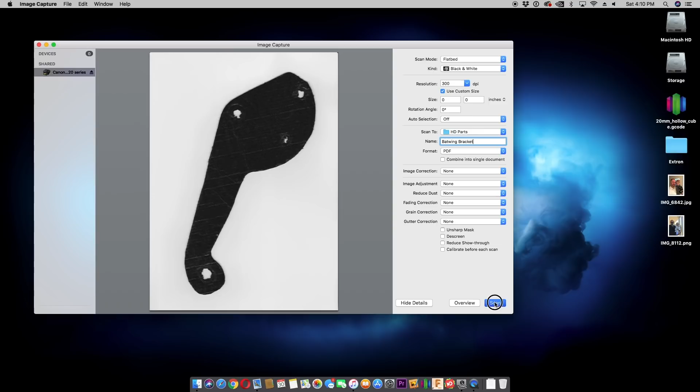Right, everything else is pretty much standard, and we'll go ahead and just scan this in. I'm using Image Capture on the Mac. Oh, sorry, I didn't select my area. We'll just let it auto detect. Looks good. And we'll just go ahead and scan it.

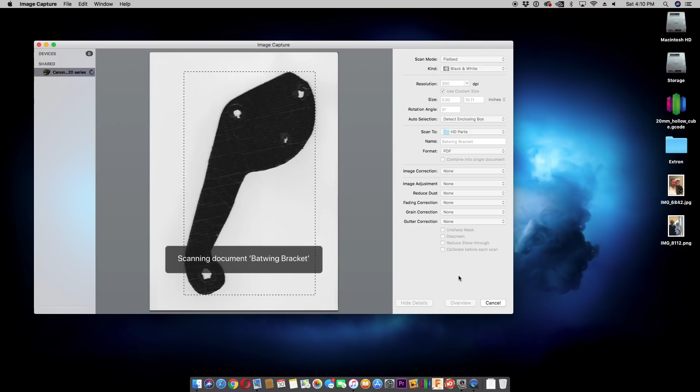Alright, so there it is. It's scanning, warming up. This is the hard part, right? It's making sure we've got this nice clean line, good contrast.

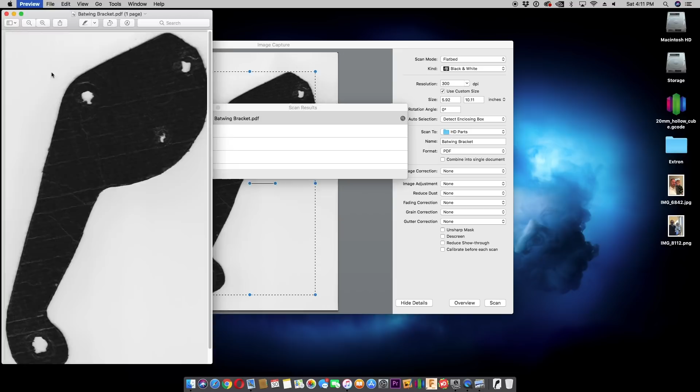So now when we open this—oh, I saved it as a PDF. Oh well, we're going to export it. Yeah, I made a mistake. This needs to be a JPEG for what I'm doing. I could use PNG, but we'll do that. I'm just going to save it in my downloads for now. So I've got it as a PDF if I ever want to print it off and do this by hand. It's there. We are ready to go.

So I am now working remotely on my PlasmaCAM. Do a new drawing. And so this is one of the tricks that I do all the time—rather than have to physically be at the machine all the time, I'll use remote desktop to get to it.

So we're going to import our drawing that we just scanned. And I did go back and make sure that it was in the right place—it's upside down. So I know I saved that in my downloads folder, but I moved it. All right, so here it is.

Right now, I really just want the black part of it. So I'm just going to select this color and take a look. No, that's not good. So now I need to add that in. All right, so we're starting to get a better feel for it.

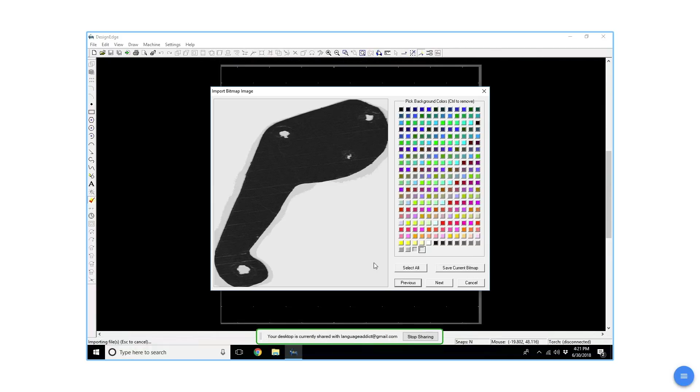I could pick one of these in here. We're pretty good at this point. Maybe I'll go one shade darker. All right, that I think is a pretty good outline. It's not perfect, but we're here and it gives me something to work from.

Now, I should have gotten some of this ready ahead of time. I'm back. So I know these two holes are 313.

I also know their distance. So I look at that, it is 185. Of course, I'm getting all kinds of stuff on here when I don't want to. When I'm recording, okay.

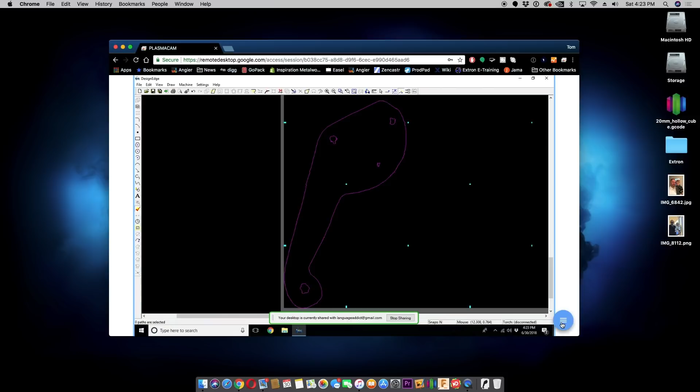So if I were to just drop a point. Let me make sure - oh really? That's neat, I have to do a lot of editing here. So if I were to drop a point about the center of where I think that is, and about the center of where I think this is - that's annoying.

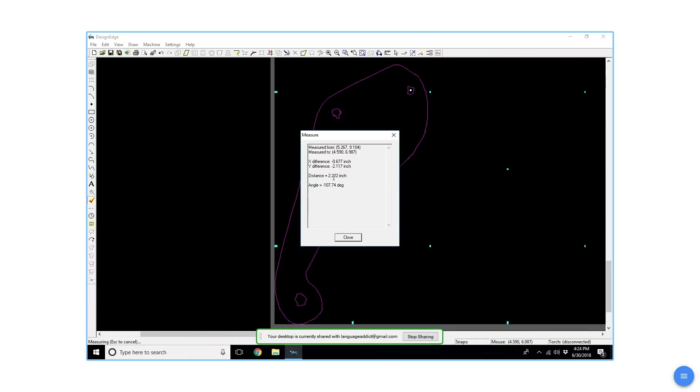I should be able to measure from our point here to our point here. All right, so I'm a little off, but actually I'm not that far off, right? Good. Now I know those points aren't perfectly accurate, but that was just to get me close.

So that's good. I know that these circles are 313. I'm going to oversize them just a little, make them 325 because I can. So I'm gonna put that guy about there, and I'm gonna do it again.

I know I'm using some shortcut keys that are specific to mine, but that's okay. Now what I will do on these is I will adjust these holes to be right. This hole is actually supposed to be a slider, and according to the original bracket, it's about 680.

So we'll do the same process. We'll do a circle, 0.680, and we'll drop that guy roughly center on where that mark was. Okay, there's that. We'll smooth this a little bit, so we'll go in, edit, smoothing, and you can either just click - I'm gonna give it 10 thousandths. That helped a lot. I'll probably just go back in and clean all that up anyways.

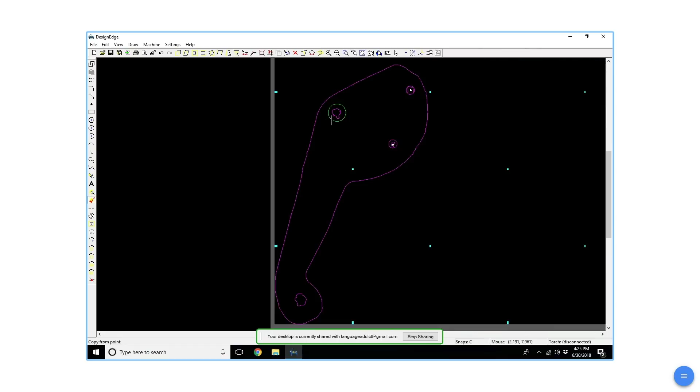Oh, this guy down here is also one of these, so we'll copy that. And we'll go from the - oops, wrong button there. Let's copy it from here. Oh good, get my center point.

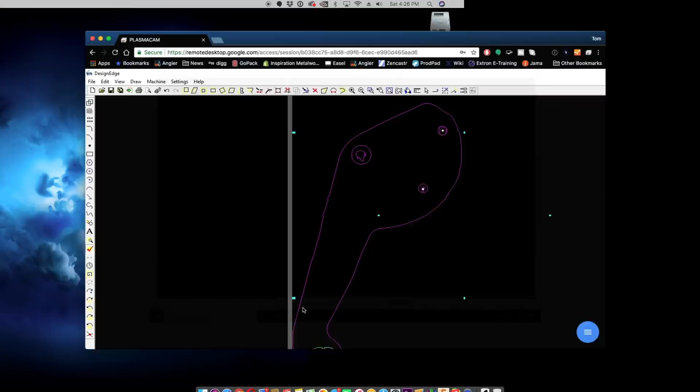And we'll drop that guy right about roughly the center of that. Not so much, dang it, I keep doing that. This is the problem with keyboard commands. Roughly the center of this, right? So I'm looking at this part, because these holes were just kind of ripped in. They weren't exactly right. Okay, so this gets me pretty close.

Now, what I typically would do for this now is just start cleaning up, right? So I will turn on things like snapping to node points, and I see all this jagged stuff. Well, I know that I've got a node point that's pretty straight here, and one that should be right where that's tangent.

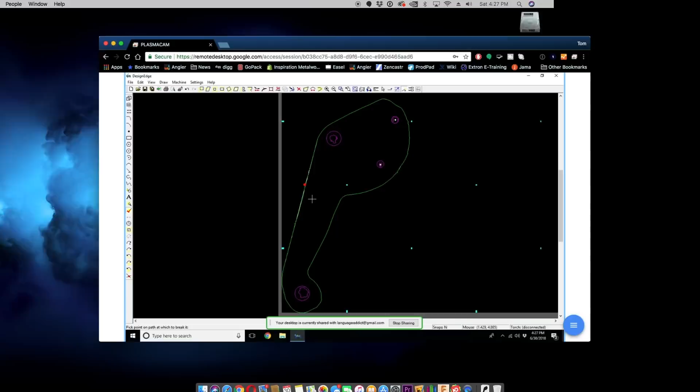Now that that's there, I can actually trim all that other junk out - wasn't, oh dang it, did it again. This is really annoying, we're gonna undo. Okay, so now that I have these, I can come in here and trim this other stuff out.

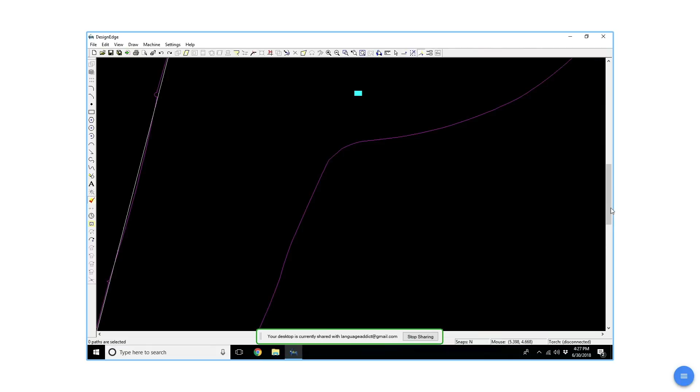One thing that I typically do is let's zoom in, so I can see, and you guys can see now it shows up a whole lot more, right? Yeah, I know I'm sharing - just get this out of the way. Now you can really see that. So if I come up and use my trim tool, right, and start to bring some of that out of there.

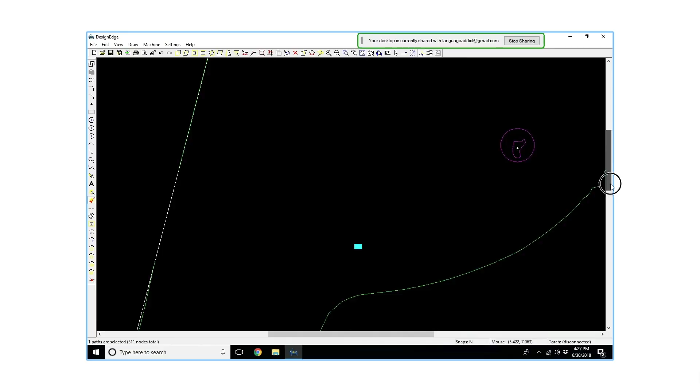I can, and it's much harder to do because I'm doing this on a remote. I can start to say, okay, well, there's that part, there's that part. I zoom back out. Too far. I start to look at this part that's not supposed to be here anymore, and I can just press the delete key. I can start to figure out where the parts are that need to get trimmed.

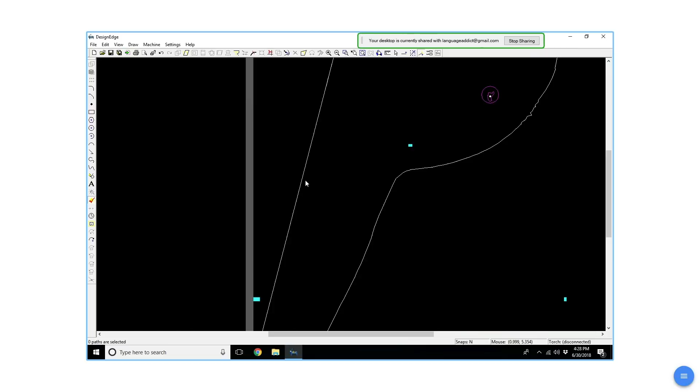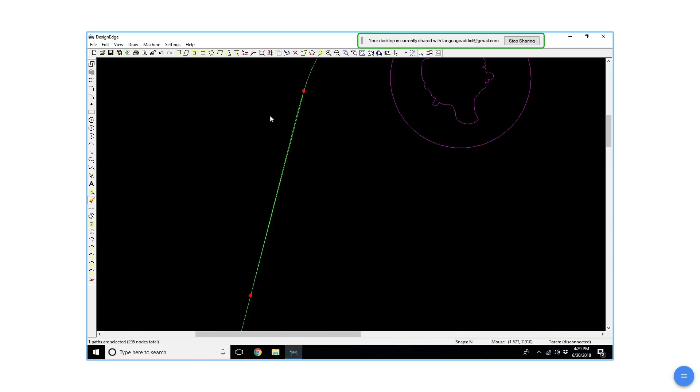What's nice about this is you just have to be close. It might be it. If I join it, no, there's something wrong. There's still something there. So if we zoom out and press D, we'll start to see, oh, there's intersections. Now I can zoom in on that area, figure this out. We'll zoom way in. I can see where they start to get that overlap. So let's just clean it up. Then I press J to join it, and now you can see how the color changed. We're in good shape there.

We can zoom - that's not what I wanted. Zoom to the extents of our part, and you can see how we went through.

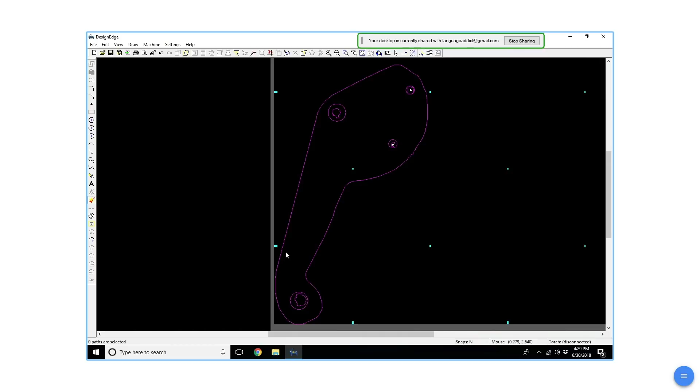Now I'm sitting here going through and slowly explaining what I do. I'm doing it remotely - this is not how I typically do it. I can't use all my function keys the way I typically would. I am much faster at the machine, so I'll finish the rest of this at the machine. That was just to give you an idea of how you can do this. I'll clean all these up to make it look a whole lot prettier here real fast. It won't take long at all. Then I will just make sure that my measurements are right, and I'll be ready to cut it.

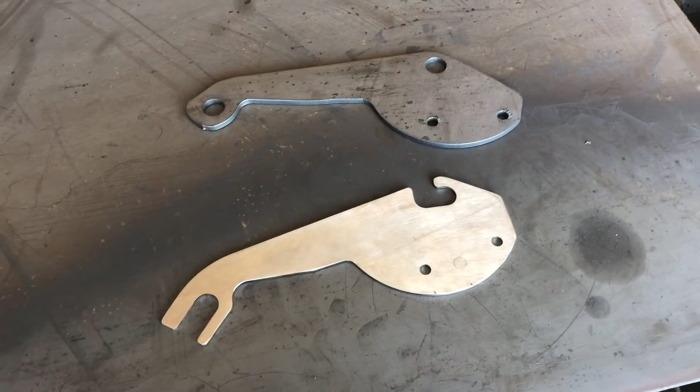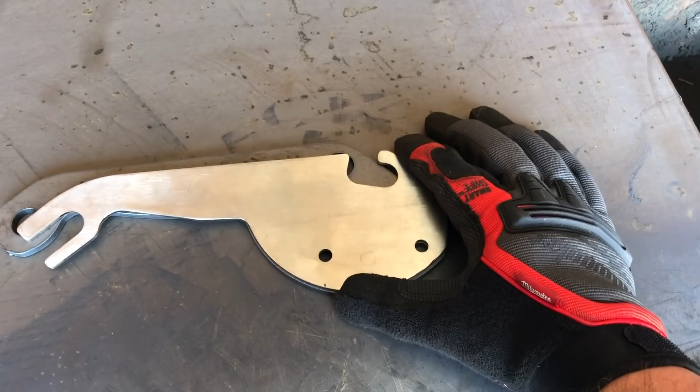We've got our cut part. There's a couple of dimensions that are critical, right? So we need this spacing, and then this spacing - these are the critical elements. This is a stretched out part, so I can't just lay it across and see how it did. What I can do is check that whole pattern, which you can see is pretty well spot on. And then this whole pattern to make sure that it's going to fit, which looks like it's working. So I believe we've got our part done, and we'll just cut the other one and we'll be ready to go.